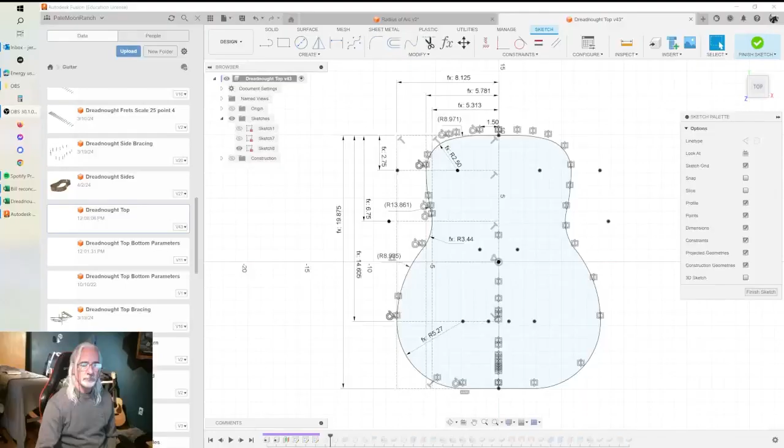It's been a challenge for me to figure out a way to get the correct shape of a guitar, a dreadnought in my case, modeled into Fusion, but I think I've come up with a way of doing that here, so let's get into it. When I designed my guitar in Fusion, I really had no way of getting from a set of plans or from a guitar the exact shape of a dreadnought guitar in there.

I have some dimensions. For instance, I have the dimension of how wide is the upper bout. I have a dimension of how wide is the waist. I have the dimension of how wide is the lower bout. I know how long the body is. I can get those dimensions.

What I can't get is, well, I also have where is the center of the upper bout. I can measure that off of the plans. And I can measure where is the middle of the waist and where is the middle of the lower bout. But what I can't get is the actual radius of all of these curves, because it's not just a matter of circles like I did in one of my sketches I'll show you. It's not just a matter of three curves. There's actually 1, 2, 3, 4, 5, 6 different arcs in here to create this shape.

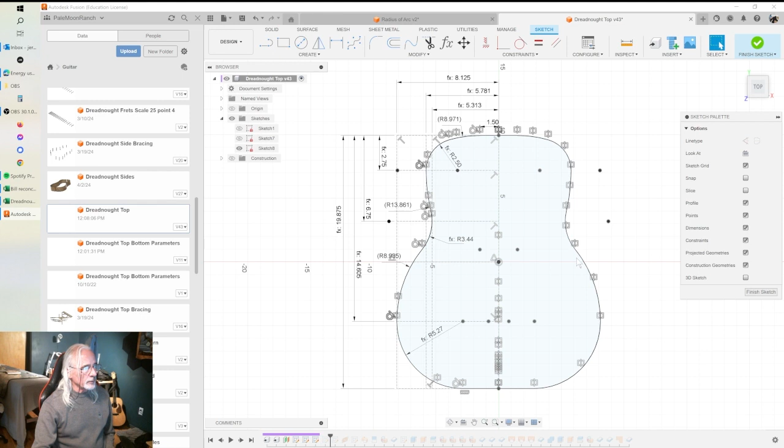So what we need is the radius, and we don't need the radius of every curve, just every other one. Let's turn off that one. We want the radius of this lower quadrant down here. We want the radius of the waist curve. And we need the radius of this curve on this upper corner. Then all of the ones in between we can create with a tangent 3-point arc to get what I believe is a pretty accurate depiction of a dreadnought guitar.

So here's how I did it. I grabbed the guitar. This is a guitar that I made by hand off a set of plans, without my CNC and my CAD program. So this is a pretty accurate shape based off of doing the work by hand off of plans.

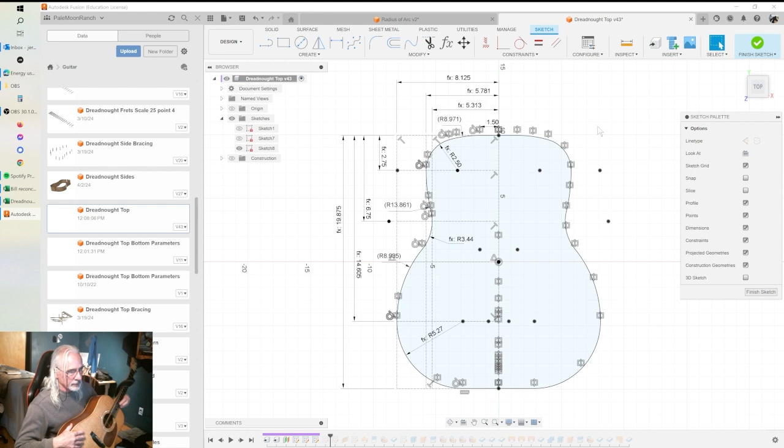To get these radiuses, I took a piece of tracing paper and laid it on the guitar on the radiuses that I wanted. I want this lower quadrant, so I laid the tracing paper on here, traced the edge of the guitar, and got that radius. I was careful to only get the radius of this rounded edge, not where it transitions.

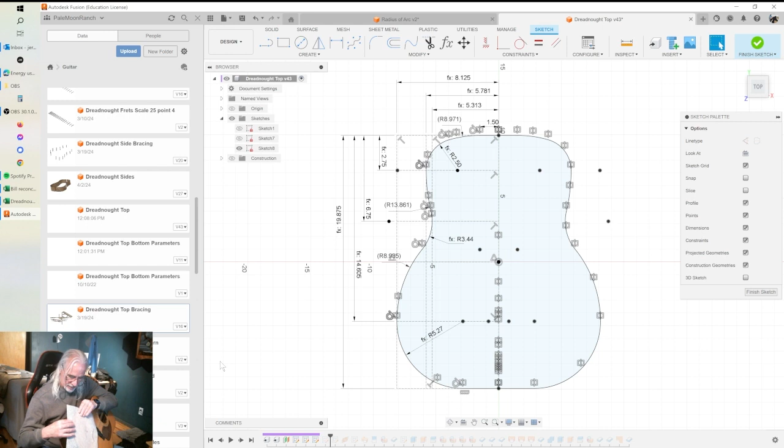It doesn't matter how long of a piece; you can get as small as you want. But the longer you make it, the more accurate of a measurement you'll be able to make in a minute. So I would get as much as I can. Next I came up here and did the waist.

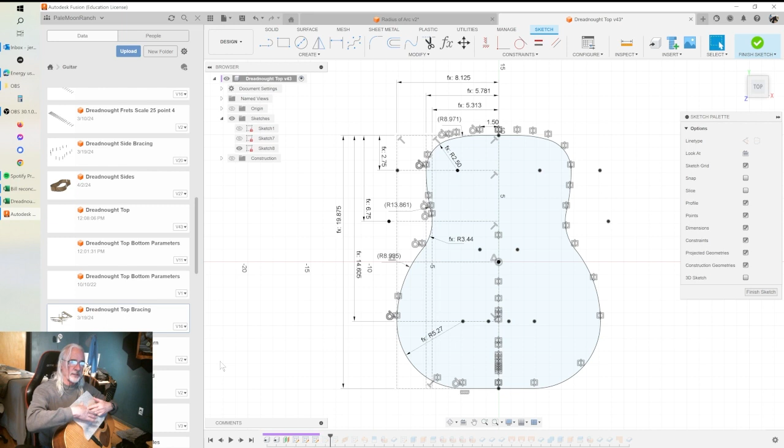The arc in here is much smaller, so I could only get a 3-inch. So again, I put it in the waist here, and I just traced that arc that's right in the middle of the waist. And then the last one I did was up here on this upper quadrant, and I laid it on here, and again I traced that. And again, that's a tight turn, so I was only able to get like 3 inches of arc.

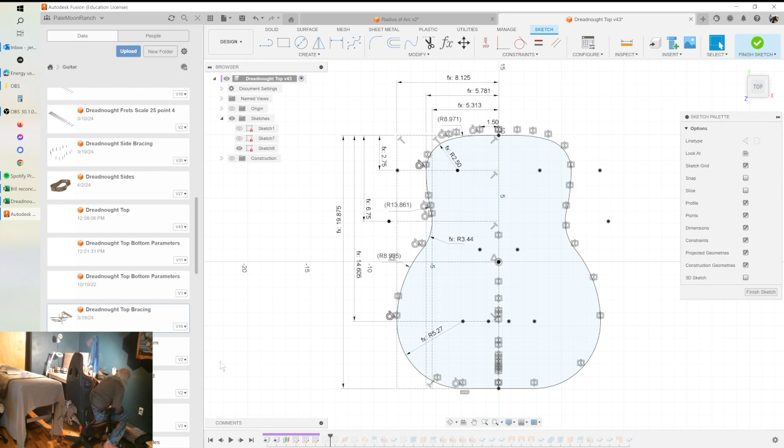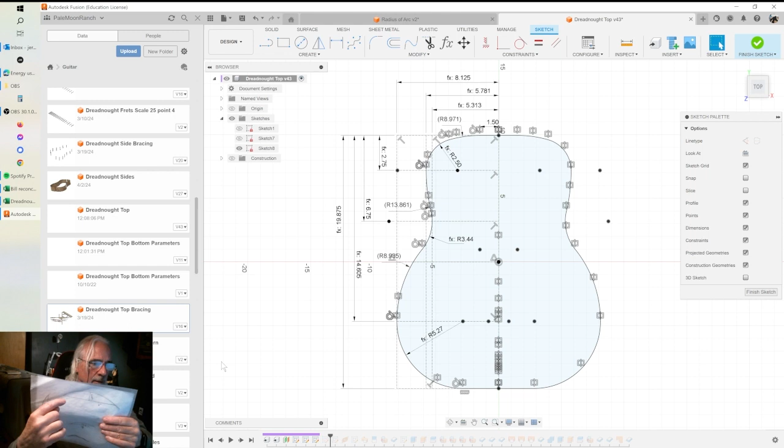Once I have those, you need to draw a line that is a chord. So any 2 points on this arc, you're going to draw a line across there, all the way across until it joins on the other side, with a straight edge. Once you have that, you have to find the center of that line. So on my ruler, I chose a 6-inch line, and I just made that 6-inch line to where it intersected the arc in 2 points.

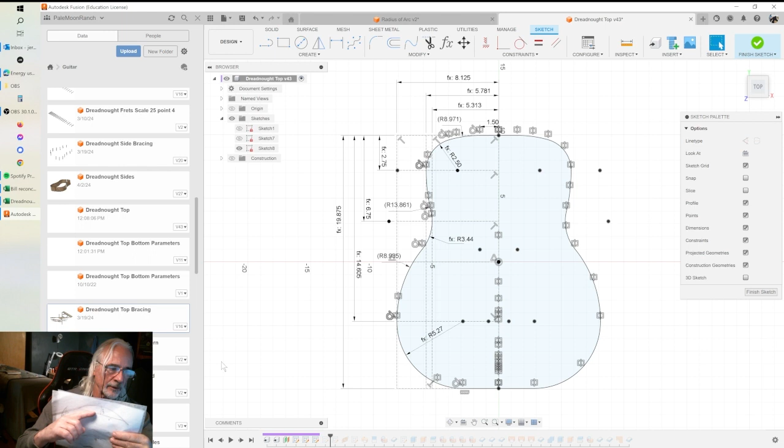And then I went to 3 inches for center, and I marked a point there, and then I needed a vertical line going up to the top of the arc. I used a square to do that. So I put a square on the line and draw a vertical line up. So now I need to measure that line that I drew right there, and I need the measurement of the lower line, which I already had, 6 inches. So I measured that, and I got 0.9375, I believe.

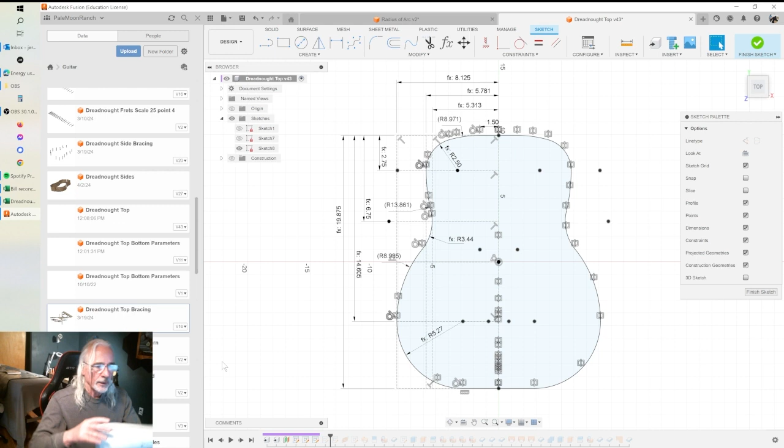I'm going to do the same thing on the other two. I put those up here, but you can see they're much smaller arcs. So I used a 3-inch line on the bottom, and then drew my line from 1.5 inch straight up and measured that and measured the other.

Now, I took those numbers and I put them into a spreadsheet. So what I've done here is I took my drawings that I did on my trace paper, and I recreated them in here, basically using that same technique where I drew the chord that I measured. I drew the height, and then I created 3-point arcs on here. This is all just for illustration purposes, but I took those measurements that I got right here and put them into my spreadsheet under arc height.

For the lower bout, I got 0.9375, 0.50 for the upper bout, and for the waist, I got an arc height of 0.3438. Then I put in my chord widths, the widths that I had used to determine that: the 6, the 3, and the 3. And then I've got this calculation in here, which is the height of the arc divided by 2 plus the width of the chord to the power of 2 divided by 8 times the height of the arc.

And that gives me this radius of 5.27, 2.5, 3.44, and then the diameter, I just multiplied that times 2 to get the diameter, just for informational purposes in the spreadsheet.

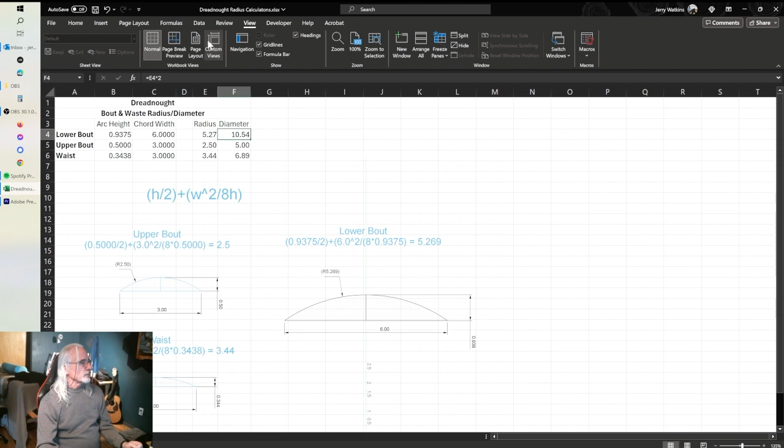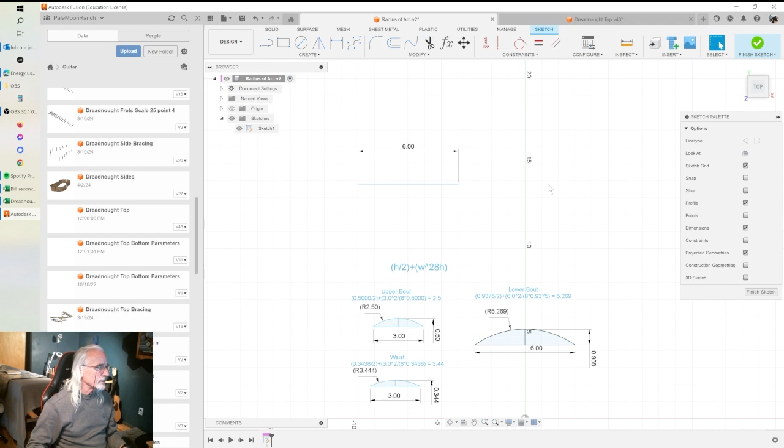There's an easier way to do that in Fusion, so let me show you how I did that. I'm just going to go up here on top. So I know that my bottom chord was 6 inches, so I'm going to draw a 6-inch line in here. Let's get in closer. And I'm going to draw a vertical line from the center of that straight up for the height of my chord, which I know was 0.9375.

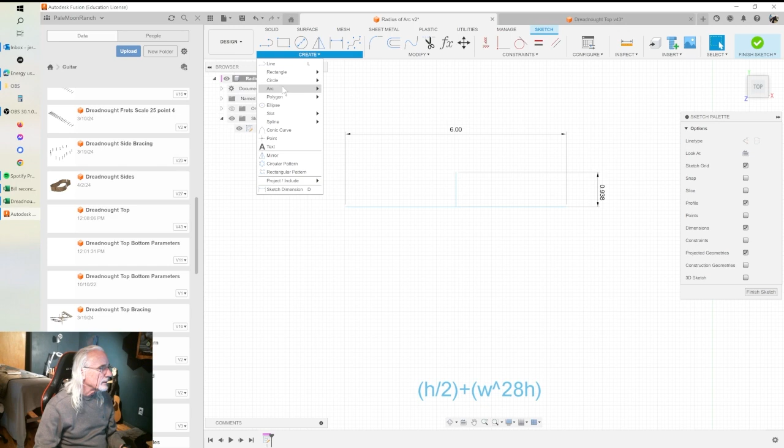Now that I have those, I'm going to do a 3-point arc, intersecting the end of the chord and tying it to the top of that line. And now what I have right there is the radius of my lower bout on my guitar. If I throw a dimension on here, it's going to tell me what my dimension is. Driven, because it's constrained already. So I got 5.269 or 5.27, which is the same number that I got in my calculation in my spreadsheet.

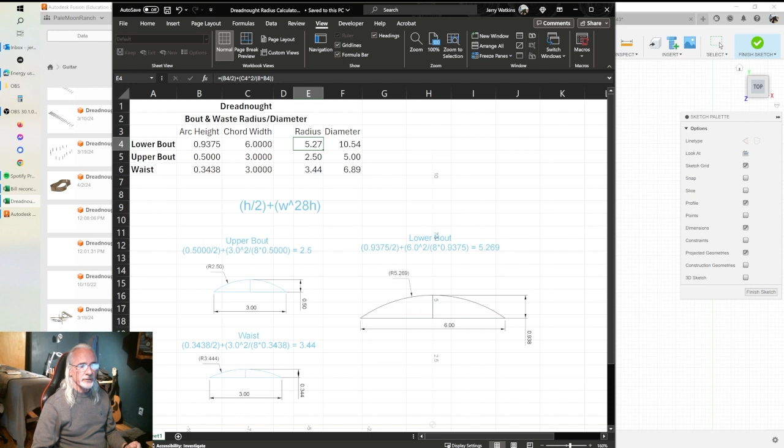I have this constrained to 2 digits. So you see how I did that? Very easily, with those two measurements, I was able to model the radius and grab the dimension. So once I have that dimension, now I can go use it in here. And then, of course, I did the same thing for the other 2 arcs. So now I've created a 3-point arc.

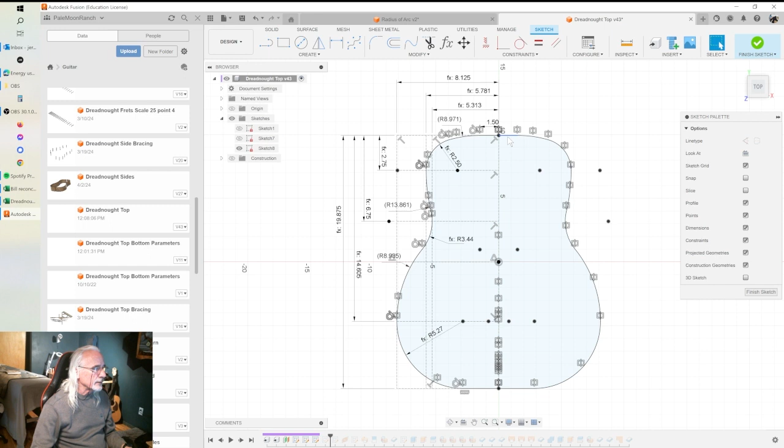I don't know if I need to delete all of this and show exactly what I did. Maybe I should. So let's go ahead and delete the mirror.

Okay. So let's delete out the interim ones here too. Up here, here, and here.

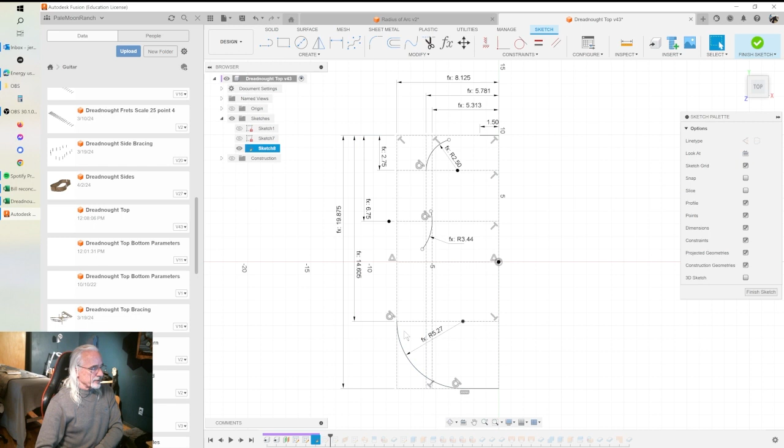So what I've done is I've created 3 arcs in here. The lower bout one that I just did, and I tied that to my construction line that I have dimensioned to the center of the lower bout, and I radiused that at the radius that I calculated. And then I constrained it to my lower bout width with a tangency, okay, and a tangency on the bottom as well down to that bottom construction line in order to tie that in.

And then I created an arc here. Its only constraint is going to be, with a tangency, I constrained it to the waist width construction line here. Make sure that the 2 endpoints of this arc are not constrained. They'll need to be free when we add the arcs in between these other arcs and make them tangent.

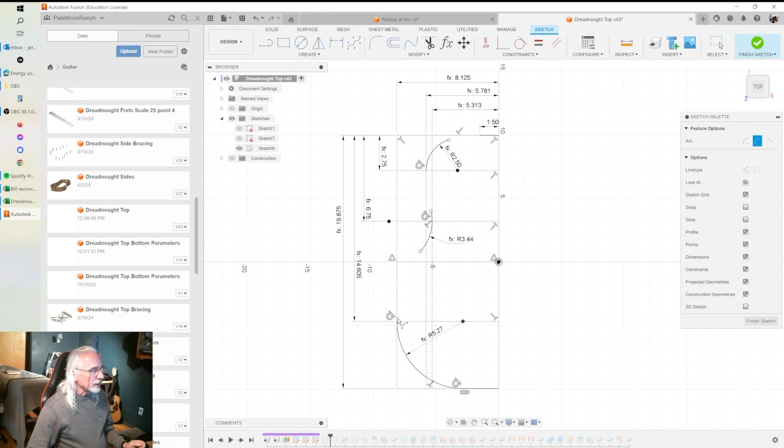What I'm going to do now is I'm going to create another 3-point arc here. Once I have those in, I'm going to take it off of the end of this to over here, and I'm going to pop it in there and let it do a tangency. So it's going to do the tangency here. It didn't do it down here, so I'm going to go grab this and make it do it down here and make that tangent. So now I have that lower bout.

So I got ahead of myself a little bit there, and I forgot to cover this upper arch. So just splicing this in here to cover that before we cover that next arch in here. So the upper one, our radius was 2.50 off of our spreadsheet or off of our calculation we did in Fusion, and we want to make it coincident to our construction line that represents the center of our upper bout.

And then we'll draw that circle or 3-point arc, however we want to do it. It's going to be coincident to the construction line here and the intersection of our upper bout width and the middle of our upper bout right here, and then set it to that radius that's equal to our upper bout radius.

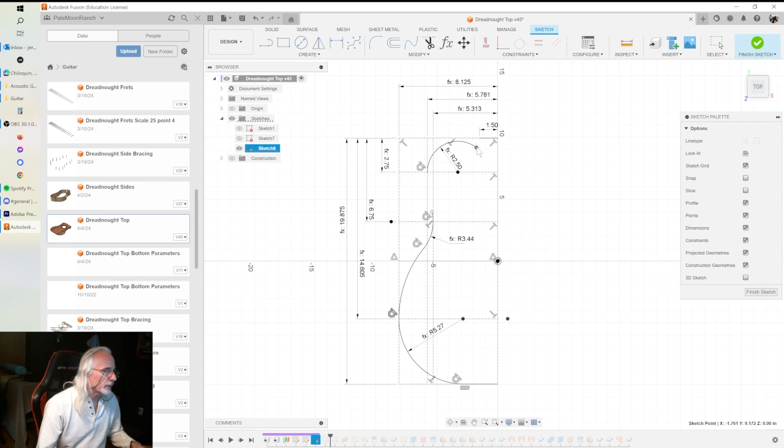We want to make sure that this, and it'd be pretty hard to do anything else, but we want this to be floating. We don't want it to be constrained to anything. Again, we're going to put another arch up here, and we need that to be free floating when we put the tangency on here, and it'll self-adjust to create a tangent arc into this point up here. So now back to our regularly scheduled programming.

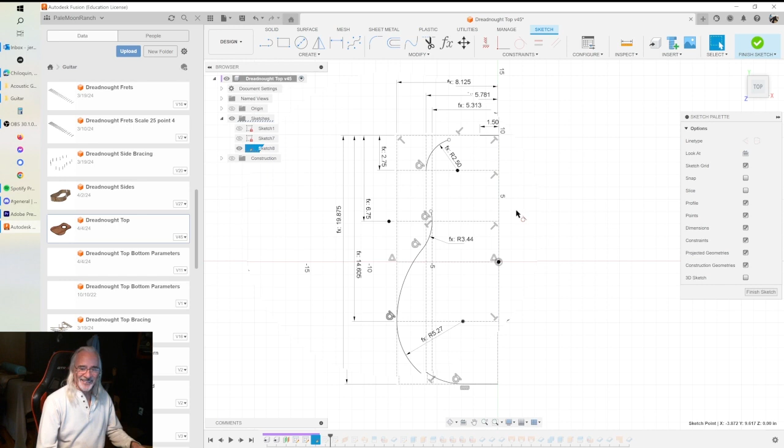Then I'm going to do the same thing here. I'm going to create another 3-point arc. I'm going to come off of the end of this line, and where I put this, like here, this is now locked in because of that tangency. This one's not. So this is floating out here.

So let's go ahead and put a 3-point arc here. Let's go off of here to here, and I'm gonna do this. See how I'm putting that there, and it's putting that tangency up on the top. So we got that tangent. We're gonna grab a tangency constraint, and we're gonna grab this and put it on here. It's gonna make that tangent. Okay, and you see it moved that point to where I wanted it. Okay.

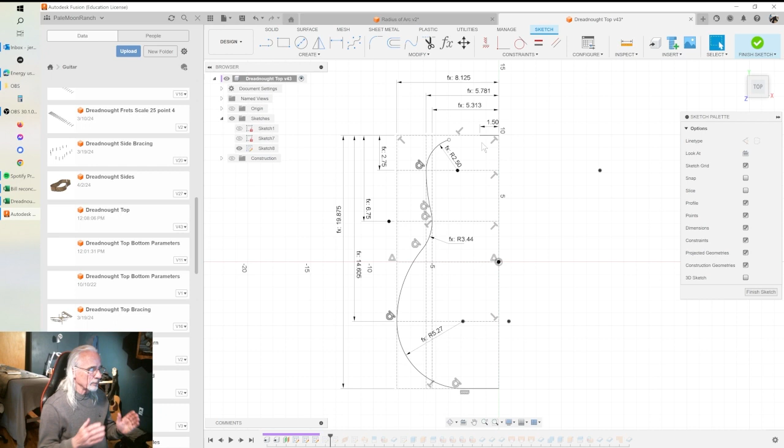Then we need one more up here to tie this in. We want to continue this curve into that straight line. So I didn't explain that I do have flat lines on the top and the bottom where my heel connects. So I want it flat across there so I get a clean thing. So rather than this curve going all the way into the point, I'm taking it to the end of that line the same way I did down here.

So I'm going to create one last 3-point arc. And I'm going to go from here to here. I'm going to click it up here to where it goes tangent up on top. Don't know if it's going to let me put it in. Yeah, it did. Okay, so now it's tangent all the way. So now I have a tangent curve here.

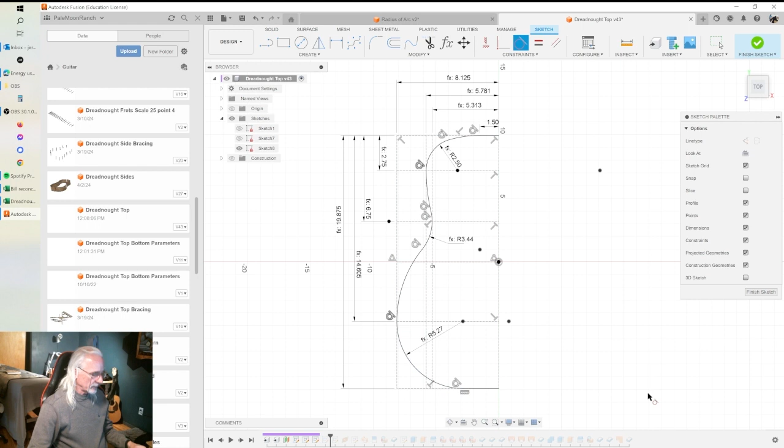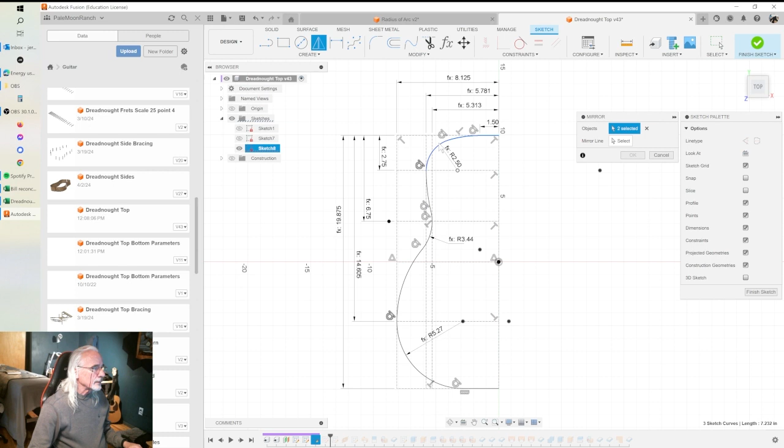And I believe that this, because of those calculations, now represents the true shape of a dreadnought versus these others that I had that were maybe just a little bit too pear-shaped. And of course I just mirror this across just like I did before. So let's create a mirror. Grab all those arcs and mirror it across my center line, and there we go. So I turn off a few things here so we can see, even the construction geometries.

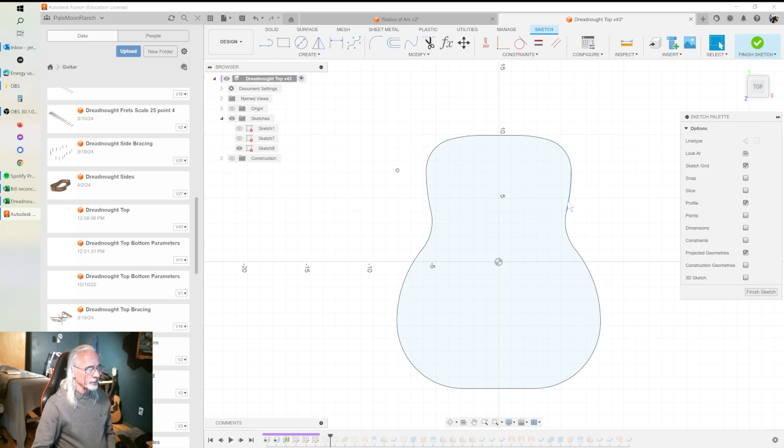So that's how I got what I feel is an accurate shape for my dreadnought guitar, and I believe this same approach, maybe with a couple of tweaks, will work on pretty much any guitar shape. If you get those radiuses and then create tangent 3-point arcs between them, I think you'll come up with a pretty accurate shape for your guitar. So hope this helps somebody.